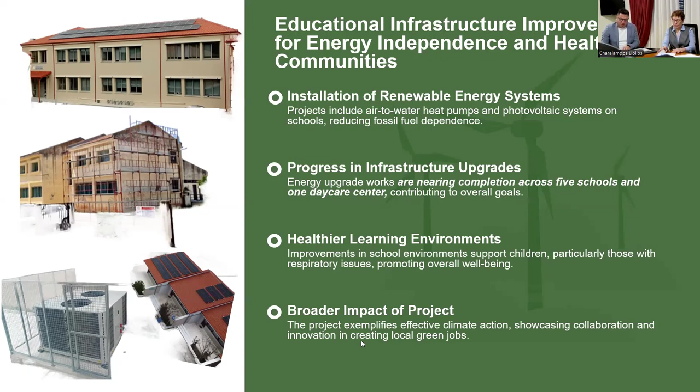Together, these energy efficiency upgrades demonstrate how climate action can go hand in hand with smart infrastructure investment. As part of our educational infrastructure improvements for energy independence and healthier communities, energy upgrades are nearly complete in 5 schools and 1 daycare center, marking a key step in Domokos' decarbonization strategy. These improvements support our climate goals by enhancing air quality and temperature regulation, making schools and childcare facilities safer and healthier, particularly for children with respiratory conditions. They also reduce energy costs, allowing us to redirect resources to critical social services, benefiting families and strengthening our community.

Among the most impactful elements of the project is the photovoltaic park at Makryrrachi, utilizing virtual net metering, as well as our active participation in 19 energy communities. These initiatives strengthen our local energy sovereignty, reduce external energy dependency, and promote community-based energy solutions.

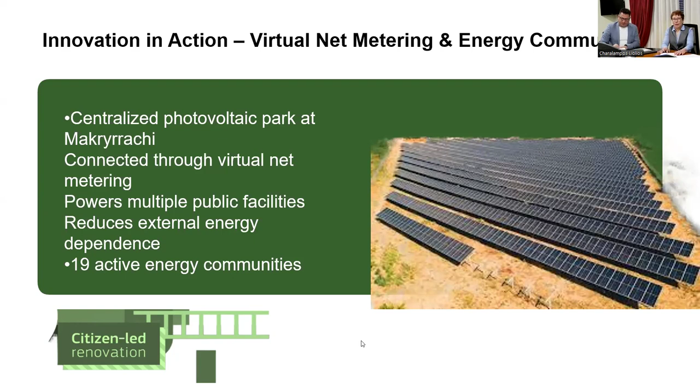Hello, as the head of programming, organization, IT and transparency of the municipality, I have been in charge of community engagement. Regarding the project, community engagement has been at the heart of it from the very start. We actively involved a wide range of groups: citizens, local schools, and key stakeholders across Domokos. In addition, scientific collaborators, energy researchers, and university faculties contributed by sharing valuable insights into the benefits of clean energy. Their expertise helped inform and educate the public, strengthening awareness and understanding.

This broad and inclusive engagement was essential not only to build trust and transparency, but to ensure that everyone felt a sense of ownership and connection to the project. By involving people early and meaningfully, we laid the groundwork for both effective implementation and lasting community impact.

Joining forces for sustainable progress means more than collaboration. It means for us building strategic research partnerships that drive informed, effective action. By using data-driven decision-making, we ensured that every step we took was grounded in evidence and impact. Knowledge sharing played a key role too, with events and community sessions offering valuable information and opportunities to learn from the experts and from each other.

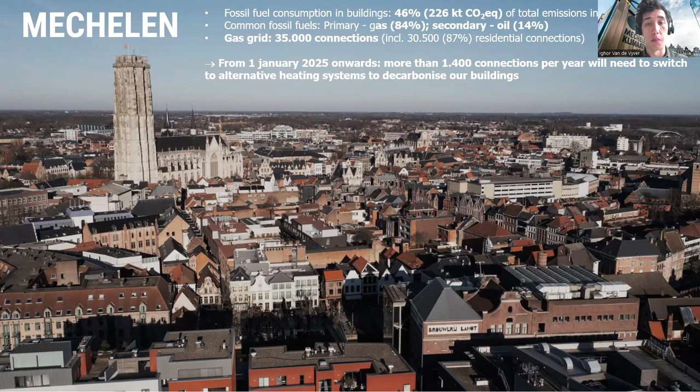Fossil fuel consumption right now takes almost half of the total emissions in our city, and mainly it's gas that's responsible for this. To give an idea of the challenge, if we count the number of connections to the gas grid, we have around 35,000 connections, of which 30,500 are residential connections. And if we want to switch them all to clean heating systems by 2050, we need to tackle more than 1,400 connections per year and help them change their heating system. And that's a huge challenge.

Nevertheless, we have a plan. Together with local stakeholders, city administration and policymakers, we made a heat transition vision, showing a possible switch by 2050, phasing out fossil fuel consumption and related practices, and scaling up clean heating solutions such as heat networks and heat pumps. In our vision, we distinguished 4 key pillars.

I will explain them today. We also identified 5 guiding principles, such as affordability, skills and capacities of the building and install sector, local community benefits, and so on. These guiding principles need to be translated into all our actions in order to advance.

The first pillar is heat planning, or how we use our spatial planning policy and building permit procedures as leverage to stimulate heat network projects or heat projects. Therefore we need to develop new planning instruments and integrate them into our existing practices, and one of these instruments is heat zoning plans.

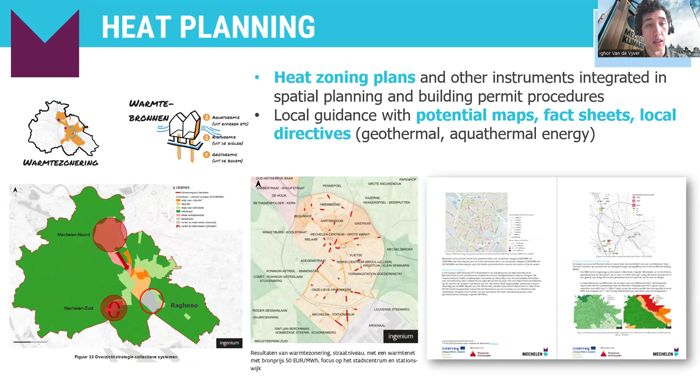So we made a heat zoning plan for the city of Mechelen, and we also developed local guidance with potential maps, fact sheets, and local directives about renewable heat sources or other solutions that are possible but where people lack knowledge or examples of how to implement that in practice.

A second pillar is heat networks. Mechelen is a dense city. We have a historic city center with a very concentrated heat demand, some industrial areas, and ambitious urban renewal projects. All three offer opportunities to roll out district heating networks, and we as a city take the role of an energy broker to facilitate matchmaking between producers and consumers of heat via heat networks.

We believe that heat networks are a way to maximize the potential of local renewable and residual heat sources present in Mechelen. We do not have a large waste incinerator with abundant waste heat, but we do have our rivers, soil, sewage system, data centers, and sewage water treatment plants, all of which can be used as a heat source via heat pump for large-scale heat networks.

There is one heat network under construction, in Keerdok, where we have a heat exchanger in a sewage water system, 140 meters long. We extract heat from the sewage water and distribute it via heat network to heat pumps in 3 project developments. In total, around 300 dwelling units get their heat this way, combined with geothermal borehole energy storage fields.

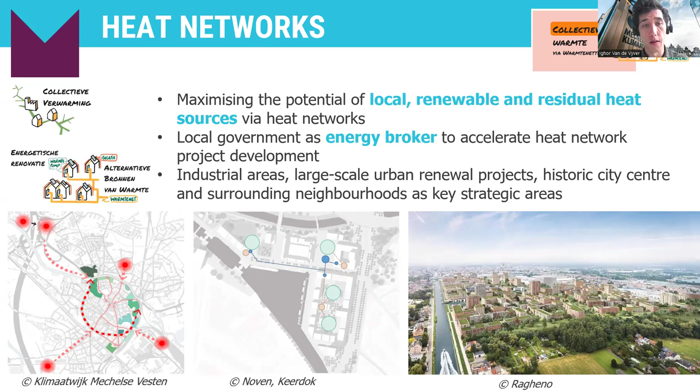A third pillar is building decarbonisation, because we need to support citizens and businesses to choose clean heating systems, and they need technical advice and financial guidance for that. So we have a building renovation service as a one-stop shop for domestic heating, and increasingly we are organizing collective project development assistance via neighborhood renovations and condominium renovations.

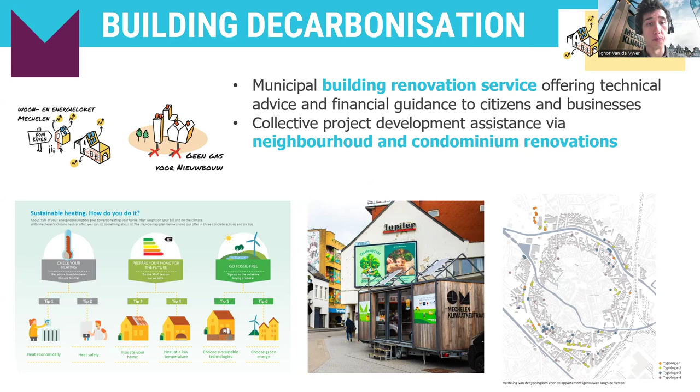What you see is our mobile office, located in one of the neighborhoods we tackled last year. On the right, you see that we also mapped all condominiums in Mechelen, because these are complex building typologies with a higher ratio of energy poverty. This way, we are able to have a very targeted service for these building homeowners.

One thing we realized throughout our actions is that we as a local authority have an important role to play, but we cannot tackle this challenge on our own, and no actor can do that alone. So we need collaborations. What we did is set up a strategic partnership, a heat coalition, in which we unite forces with local stakeholders able to engage with us and commit their resources to implement the heat plan. It's a local alliance between governments, businesses, and civic society.

We started with a transition arena, a workshop series where we co-designed our heat transition vision and co-created our action plan. Last year, we also signed a charter with 25 key local stakeholders, including energy cooperatives and distribution system operators, expressing our engagement.

My presentation is almost at an end. I just want to highlight two cases from our city that beautifully capture the spirit of our heat plan and our heat strategy. The first one is our climate district Mechelen.

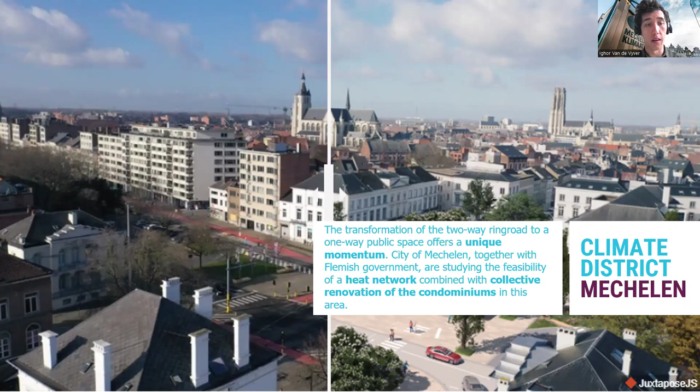And at the same time, with their central heating systems, they could be an attractive consumer for heat networks. So the study we did 2 years ago was with the Flemish government to check how we can take steps for a heat network in this part of the city.

And a second project is more about solar energy, but it's a social housing energy community Otterbeek, in which the city, together with the Social Housing Corporation and a local energy cooperative, installed solar panels on 200 dwelling units with social tenants and sharing the energy among each other. So this way, we made it possible that the local community could share and benefit from local renewable energy.

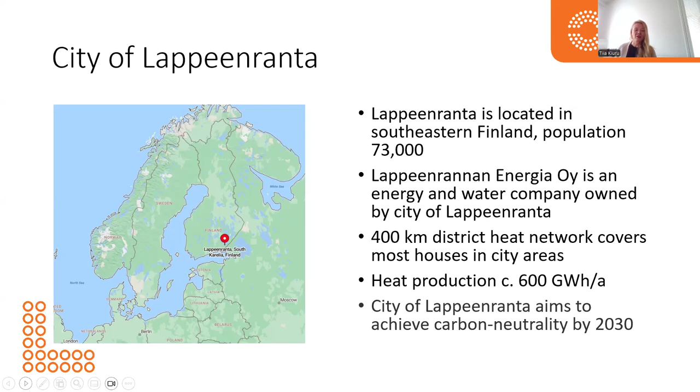The annual district heat production is about 600 gigawatt hours. Lappeenranta aims to achieve carbon neutrality by 2030, and district heating is very crucial in achieving this goal. So what we have done: you can see here the yellow columns represent the natural gas use. We started the district heating in the 1970s with natural gas, and in 2009 we built a biomass boiler, which you can see here with the green columns. It uses biomass and a little bit of peat, which we will probably end using quite soon.

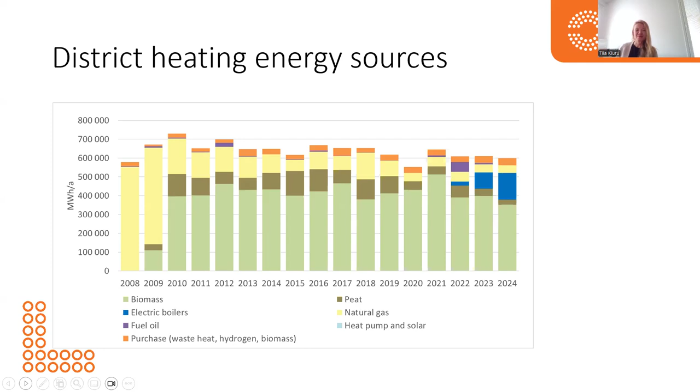In the last couple of years, you can see there's this blue color, and that is electric boilers, or heat produced by electricity. On the next slide, you can see what has happened to the district heating CO2 emissions. When we started with natural gas, it was about 200 grams per kilowatt hour, and last year it was only 30 grams per kilowatt hour. And the share of CO2 neutral energy sources in district heating last year was almost 90%.

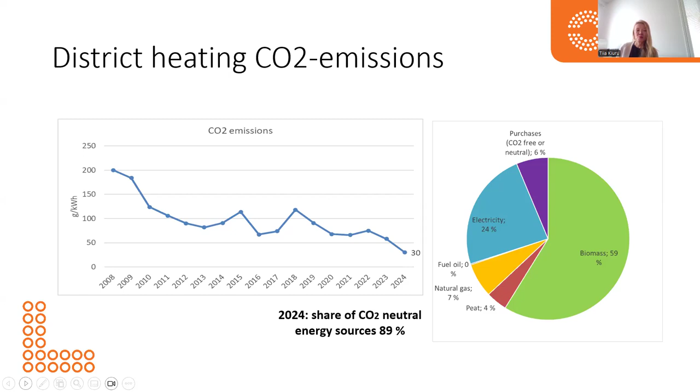The next slide will tell a bit more about the steps that we have taken. There are quite many; this doesn't cover all of them, but maybe most of them. In 1975, as I mentioned, we built a natural gas combined cycle gas turbine power plant, which was replaced in 2009 by a biomass combined heat and power plant. It's a large power plant. We built it together with the UPM pulp and paper company, and it can produce most of our district heating need, except in winter times.

But after this, we have done quite many projects. We have done heat pumps. We have acquired heat produced with hydrogen. We have built a wood pellet boiler and turned old gas boilers to burning wood pellets. We have made connections between district heating networks to increase the share of biomass. And we have modernized our old electric boiler. We have developed this new concept, electric heat and storage, which I will tell you more about later. And there's an optimization project going on which concentrates on how consumers' heat demand can be optimized to support renewable heat production. This year we completed the building of a large heat storage, and more is coming.

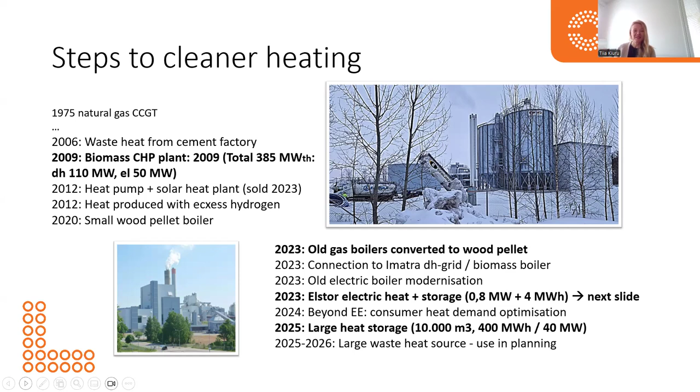On the next slide, I would like to tell a little bit more about this power-to-heat thermal energy storage. This was a pilot project, and it stores electricity as thermal energy. The output of this plant was 800 kilowatts for charging and discharging, and the storage capacity 4 megawatt hours. The solution was developed by Elstor, a local startup company, and Lappeenranta University of Technology. The project received funding from the EU and the city of Lappeenranta.

Of course, because this was a pilot project, it had some problems. For example, we had to change the material for storing the energy, and we even moved this energy storage to another district heating network. But after all the user experience and testing, it became a commercial product, and it has been sold to many industrial customers, mainly for producing steam and replacing fossil fuels. Our project was taken into use in November 2023, and in the first winter it reduced about 30% of the natural gas that we use.

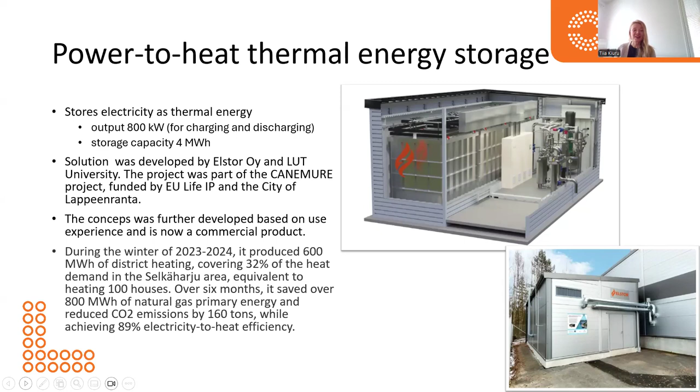So it optimizes the charging and discharging of the storage by predicting the heat demand and electricity prices, so that it can be charged when the price of electricity is cheap and discharged when the price of electricity is high.

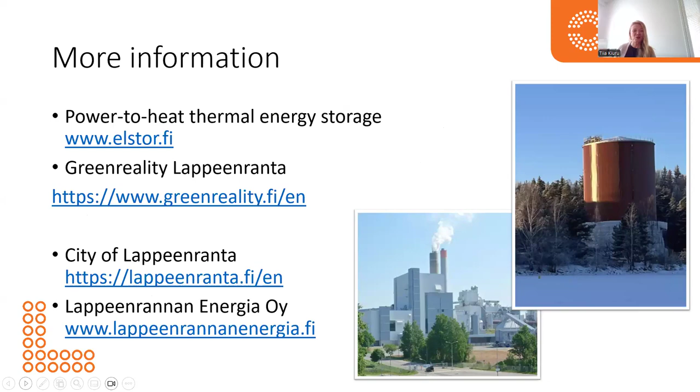And again, to you, congratulations. And it's great to see a lot of times from the cities in Finland how this journey has really been something that you've been working on for decades, consistently and constantly innovating to reduce even more the fossil fuels and the emissions. So warm congratulations to you, and very interesting to see how you're innovating.

I don't know if there are any questions here for Lappeenranta. I have one, which is about mainly the energy poverty and how this new technology, the role it plays in addressing energy poverty in the city and providing affordable heating for vulnerable populations more specifically.

A very large question. Yeah, but of course, this is also a financial issue. Of course, we have to provide district heat that people can afford. All the projects that we develop have to be economically friendly and climate friendly. They have to be cost efficient as well, because people here in north parts of Europe, they need this district heating, and it has to be affordable.